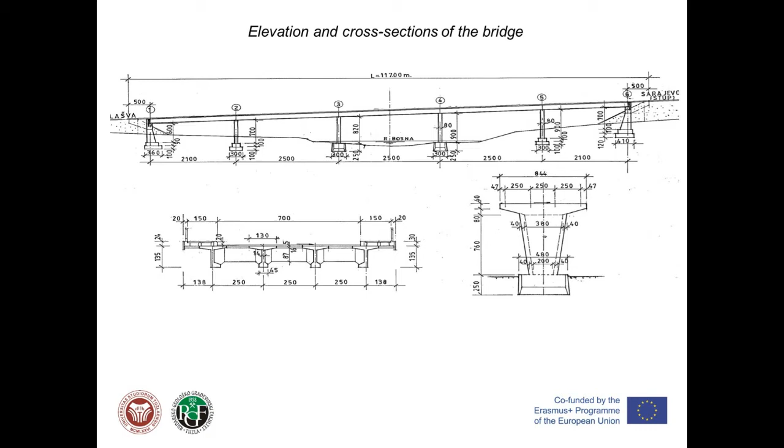The 5 spans of the deck are interconnected through a 16 cm thick continuity slab over the piers. The superstructure is supported by rectangular laminated elastomeric bearings at the 2 abutments, marked in the figure with 1 and 6, and 4 piers marked 2, 3, 4 and 5.

The bridge is instrumented for ambient vibration test. Measurements were made without traffic interruption.

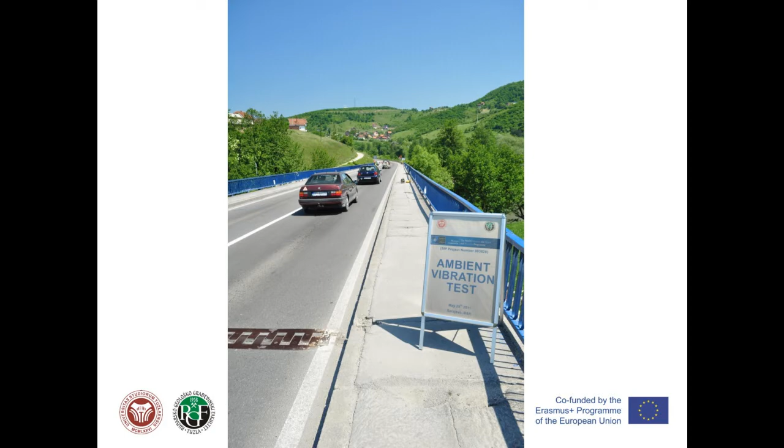On this slide, the arrangement of measuring points is shown. Ambient vibration test was made with 5 triaxial geophone sensors. One sensor was used for the reference point, stationary point 6R, while the remaining 4 sensors moved to individual measuring points 1 to 17 according to the arrangement.

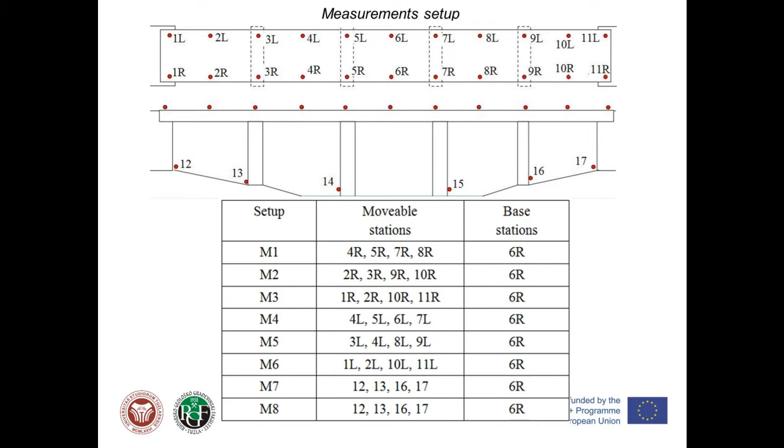Ambient vibration measurements were performed using an Instantel Minimate Pro 4 vibration monitor with sample rate from 1024 to 16,384 samples per second per channel. The triaxial geophone sensors used had a range of measurements up to 254 mm per second, with resolution 0.127 mm per second or 0.0159 mm per second, and accuracy plus minus 5% or 0.5 mm per second. Frequency range is from 0 to 315 Hz.

The recording system has start common trigger capabilities to enable synchronized data acquisition.

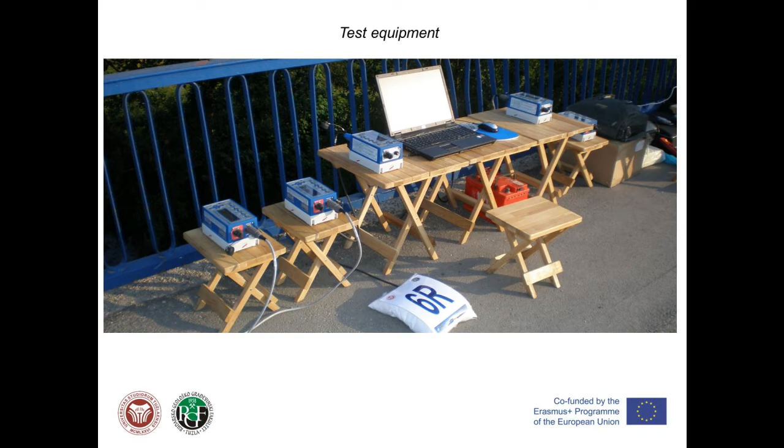During all tests, normal traffic flow was permitted. Testing started in the right lane, points 1R to 11R. Each setup yielded 3 base channels, point 6R, and 12 movable channels.

The ambient vibration was simultaneously recorded for 120 seconds, resulting in approximately 500,000 data points per data set.

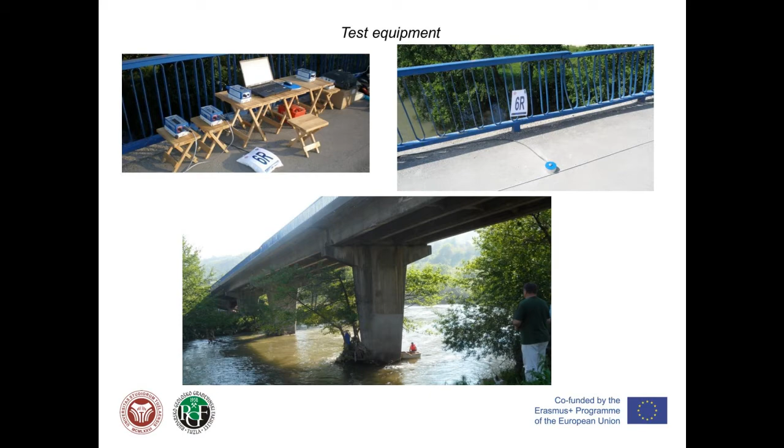This slide shows the measurements at the base station 6R.

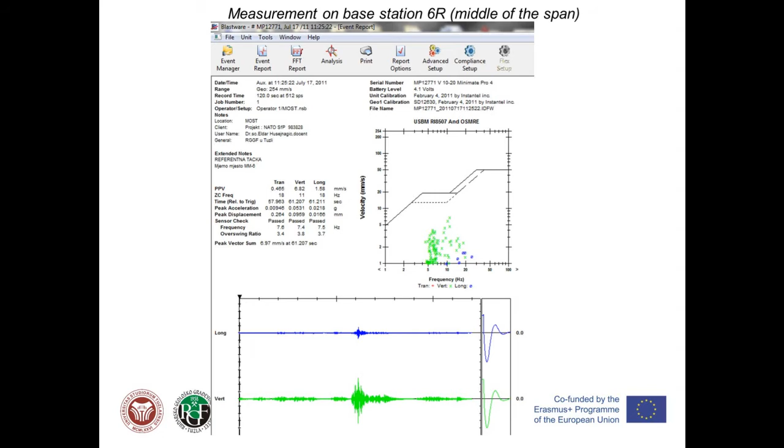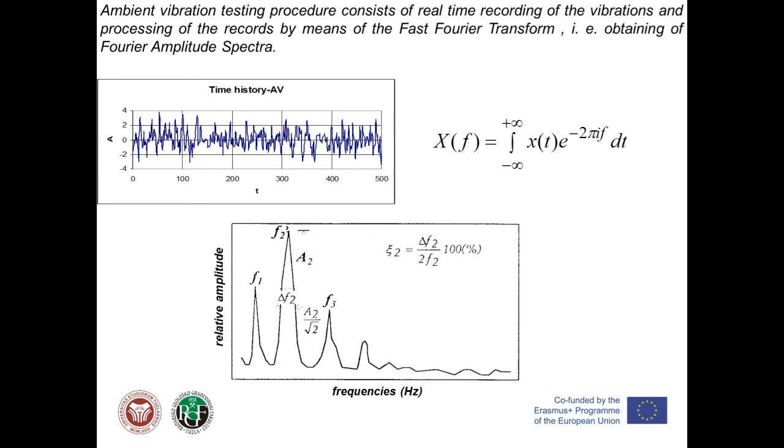Ambient vibration testing procedure consists of real-time recording of the vibrations and processing of the records by means of the fast Fourier transform, obtaining Fourier amplitude spectra. The peaks of the amplitude spectrum occur at the predominant frequencies of the time function xt, which, due to the flat spectrum of the excitation, represent the natural frequencies of the structure.

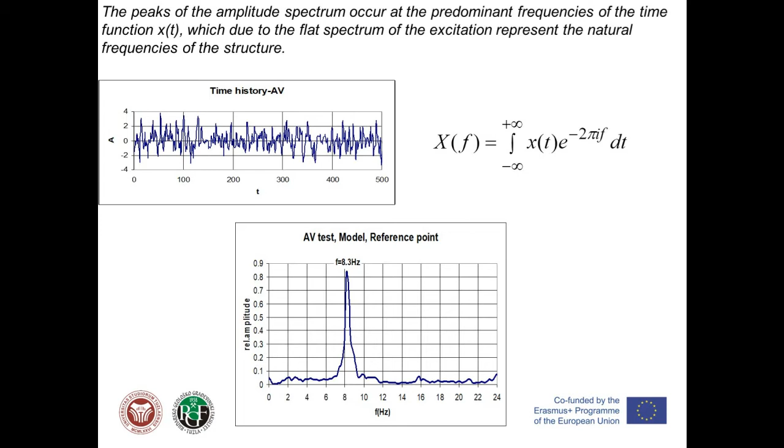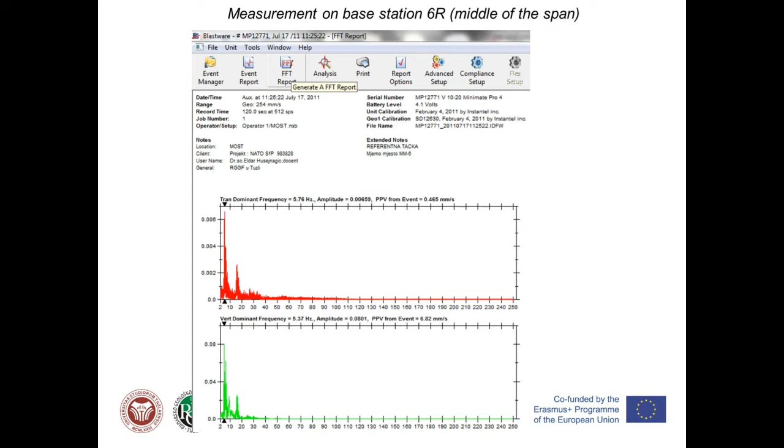The sensors installed along the deck and at the bottom of the abutments and piers recorded the bridge response and velocity time histories with 120 second recording time. Then frequency spectrum were obtained by using the FFT.

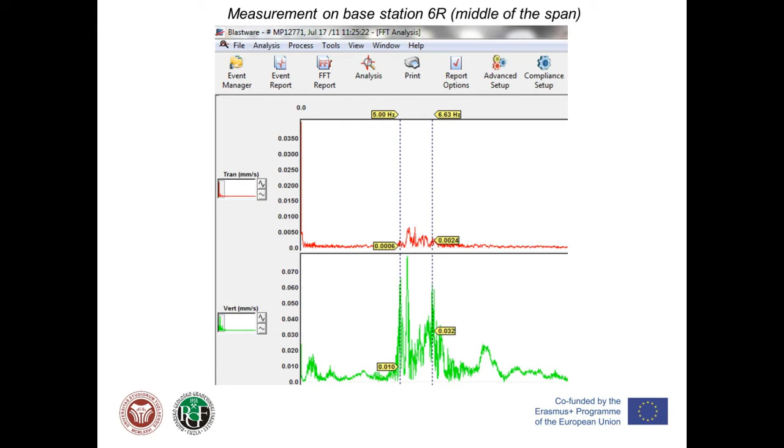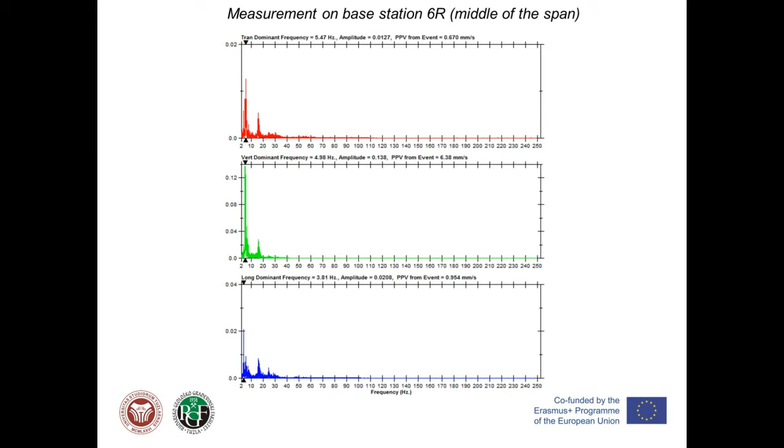Here is presented an example of one measurement on base station 6R and one measurement on movable station 4R.

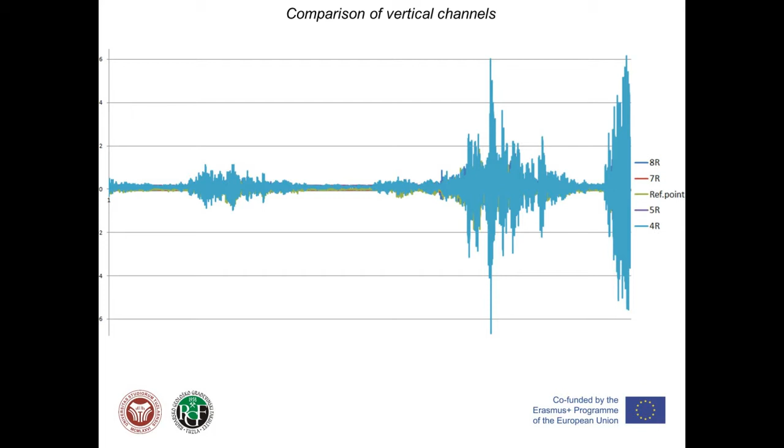On this slide, comparison of vertical channels for measurement setup 1 is presented. The dominant frequencies measured at measuring points are given in the table. The dominant frequencies of vibration of the superstructure measuring points, except for a few results, are in range from

3.81 to 7.95 Hz, depending on position of the measuring point over the support or in the middle of the field. The obtained results of measurements, dominant frequencies, are within the limits of test results on similar concrete bridges.

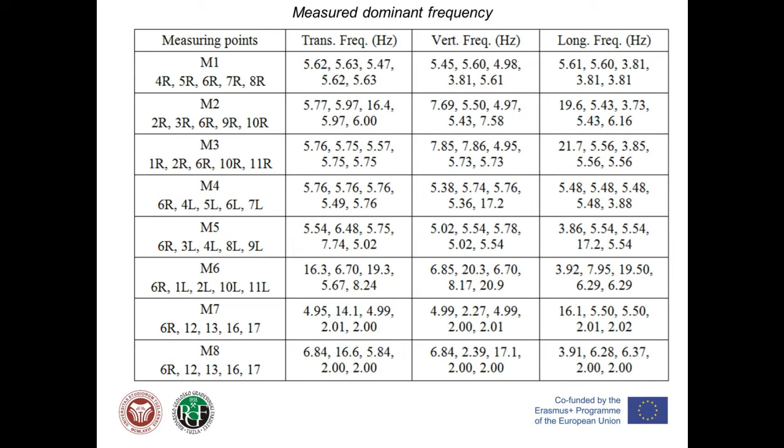There is a difference between the dominant frequency of vibration of abutments and piers on either coast, which will be the subject of further analysis by defining the soil-structure interaction.

The software ARTeMIS Extractor was used to perform the modal identification of the structure. Before the procedure of modal identification, it is important to validate all channels.

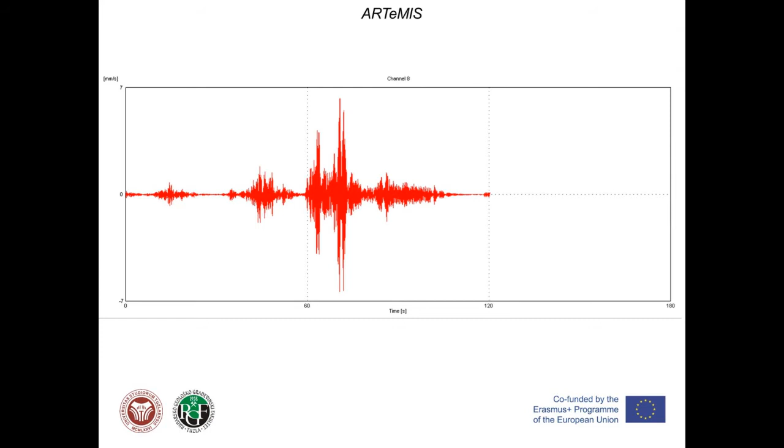Two techniques were used to perform the modal identification: the frequency domain decomposition and the stochastic subspace identification. The frequency domain decomposition, the first technique, consists of performing an approximate decomposition of the system response into a set of independent single degree of freedom systems for each mode.

The singular values are estimates of the spectral density of the single degree of freedom systems, and the singular vectors are estimates of the mode shapes.

The enhanced frequency domain decomposition feature offered by Artemis adds a modal estimation layer to the frequency domain decomposition editor. When the frequency domain decomposition analysis is completed and the mode shapes are identified, the enhanced frequency domain decomposition identifies the single degree of freedom Bell functions, and from this single degree of freedom spectral bells, all modal parameters are

estimated. The damping ratio can also be obtained.

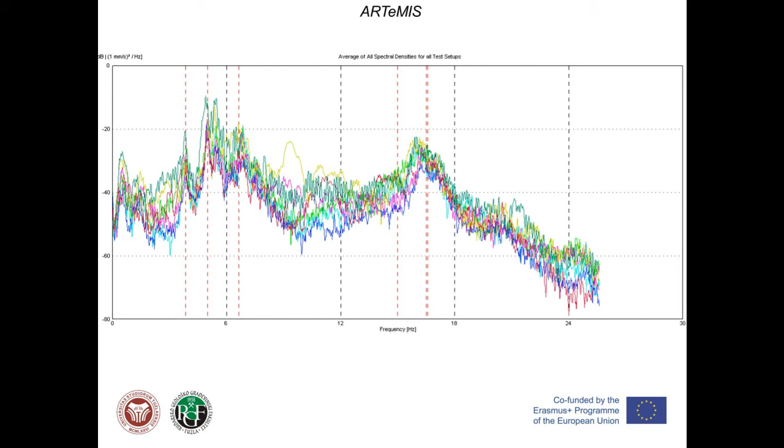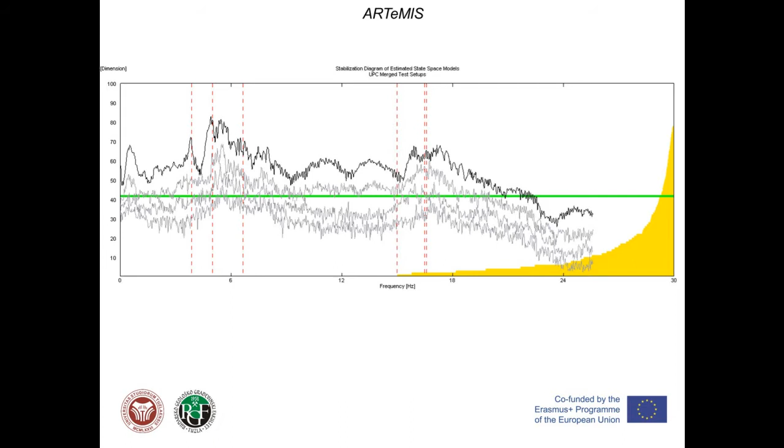Here is presented the average of autospectral densities. And on the next slide, the stabilization diagram of the estimated state space model of the first test setup, attained from vibration signals using the enhanced frequency domain decomposition and the stochastic subspace identification methods.

On this slide, natural frequencies and the damping ratios obtained from the test setup are presented.

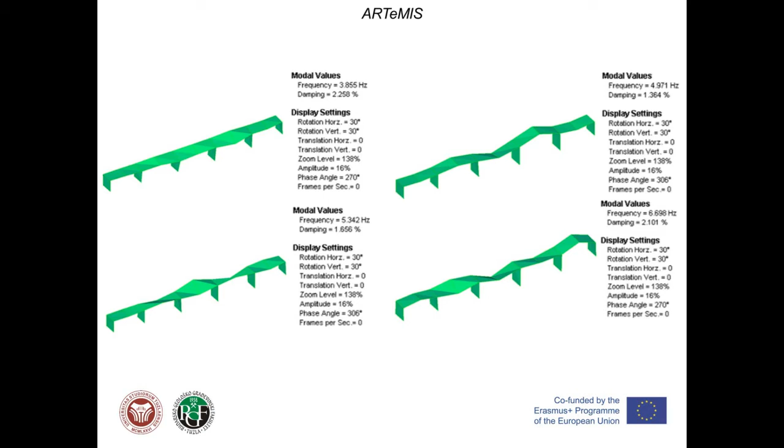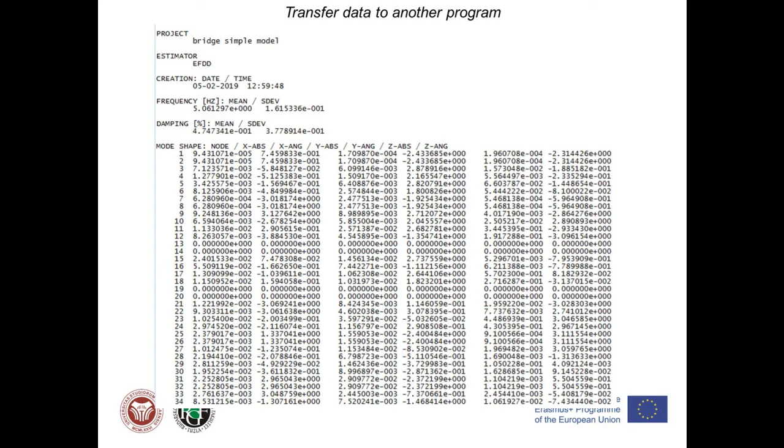For the procedure of determination of mode shapes, data from Artemis can be transferred as an ASCII file. On this slide, one example of data list is presented.

The finite element models were created using SAP 2000 based on the geometrical and material properties that were used for design, prediction of material properties after 45 years service life, and on the preliminary soil investigation.

The first set of models, called SNB1M1, is a finite element model with different soil stiffness, designed neoprene bearings stiffness and designed strength of concrete.

The second, called SNB1M2, is a finite element model with designed neoprene bearings stiffness and theoretically predicted strengthening of concrete during service life.

And the third and the fourth, called SNB2 and SNB3, are finite element models with increased neoprene bearing stiffness and theoretically predicted strengthening of concrete during service life.

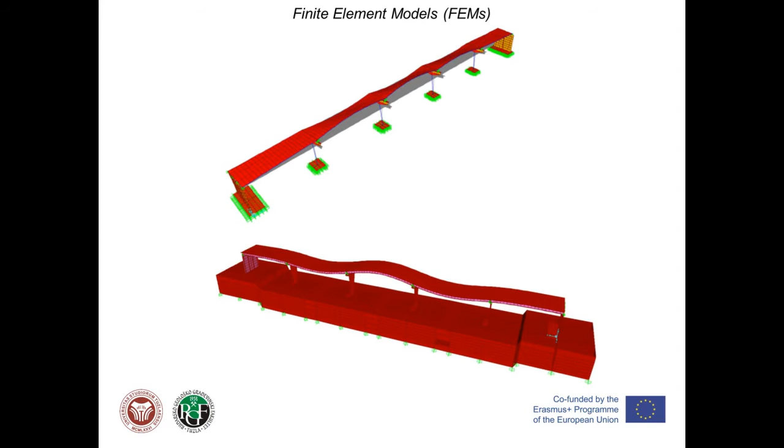The deck was modeled as a shell element and girders as elastic beam elements, as this approach provides effective stiffness and mass distribution characteristics of the bridge.

The bridge superstructure itself is expected to remain essentially elastic during earthquake ground motions. Dimensions of neoprene bearings are 300 by 400 by 100 mm, and neoprene bearings are modeled with vertical and horizontal springs.

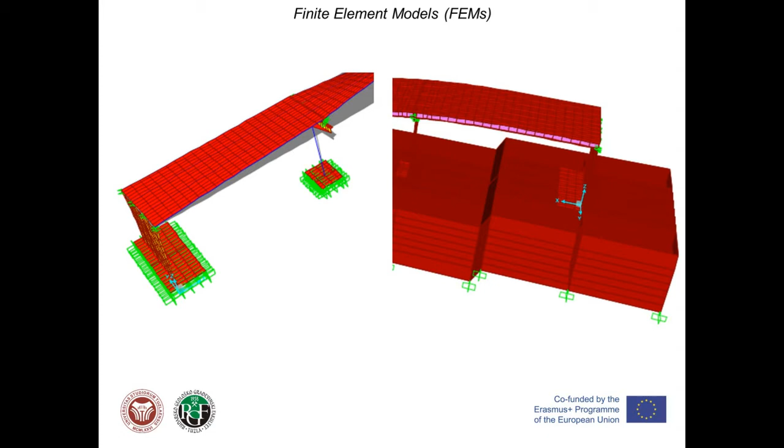Soil was modeled in two ways: a soil model with linear springs used for the structure-soil interaction in models S1 to S4, and a second, layered soil model with solid elements, models S5 and S6,

with modulus E determined by preliminary geophysics soil measurements, used for the solid elements.

The foundation structure was also modeled using solid elements, so that the soil foundation contact has been realized by identically arranged nodes of the solid soil elements and the foundation structure.

Review of the models is presented in the table.

Since the scope of the research was to validate the modeling assumptions made and identify their relative impact on the numerically predicted structural response, the developed finite element models were assessed comparatively. Through this procedure, longitudinal, transversal, bending and torsional modes were identified, whose modal frequencies are summarized in the table.

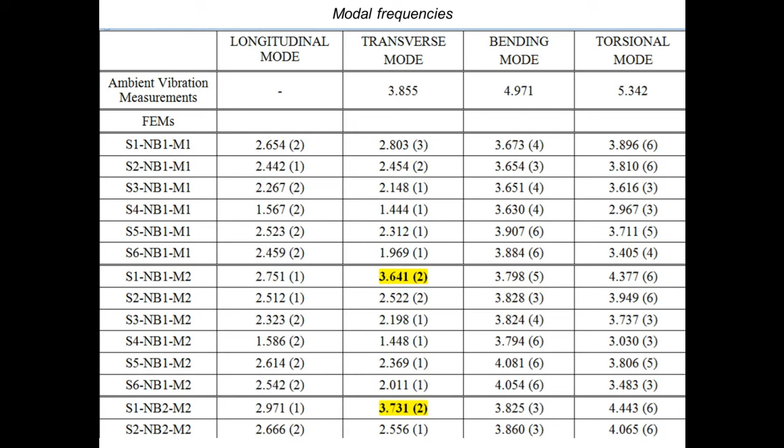The results presented in the table show the improvement of the modal frequencies predicted by the models S1NB2M2, S1NB3M2, and S5NB3M2, compared to the modal frequencies predicted by the S1NB1M1 model.

By comparing the modal frequencies predicted by the mentioned models, it is clear that the Young's moduli of elasticity for the bearings, the deck and the piers had to be significantly increased compared to the values assumed in the initial design. This can be clearly attributed to the low deformation strain levels developed under ambient vibrations, at which the bearing stiffness is significantly higher than that assumed during design. Also, the effect of concrete strengthening during service life has to be considered.

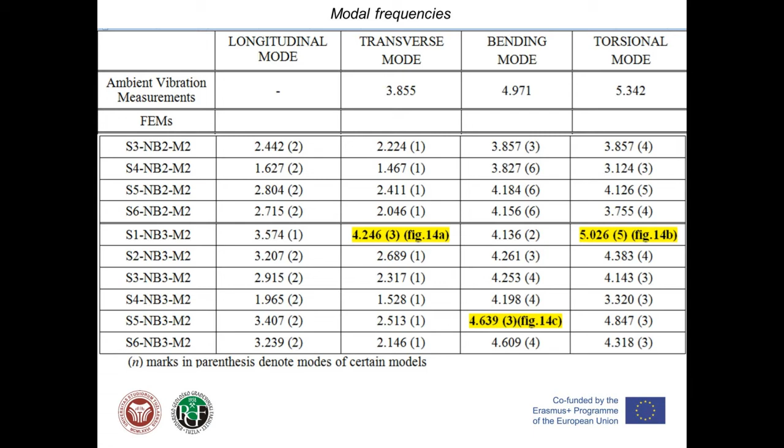For comparison of the model parameters identified by ambient vibration tests and mathematical models, two finite element models named AM1 and AM2 were selected. AM1 is the selected model S1NB3M2, and AM2 is S5NB3M2. The comparison is made for the first transverse and first vertical modes.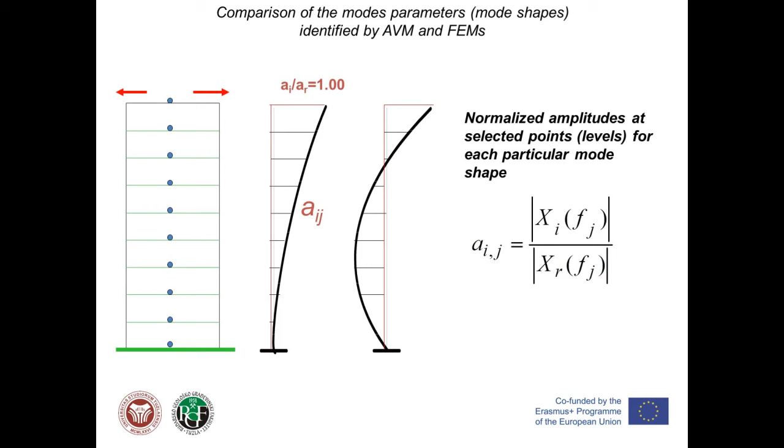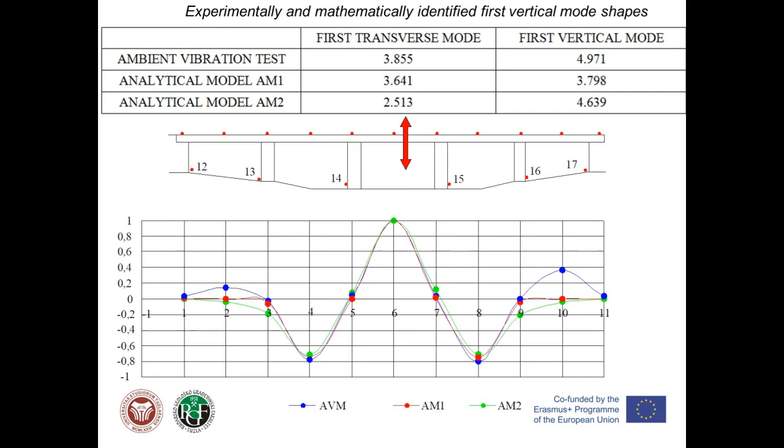Here is presented the experimentally and mathematically identified modal frequencies and mode shapes for the first vertical modes. And on this slide is presented the mode shapes for the first transverse modes. There is good agreement between the vertical mode shapes obtained by ambient vibration measurements and by the AM models.

The deviations between the experimentally identified and mathematically predicted first transverse mode shapes can be attributed partially to uncertainty in the material properties of structural elements and neoprene bearings after 45 years of service. But deviations could also be partially due to unexpected channel errors, which will be studied in further research.

Based on the study, it can be seen that ambient vibration measurement can be used to assess the dynamic properties of older existing bridges.

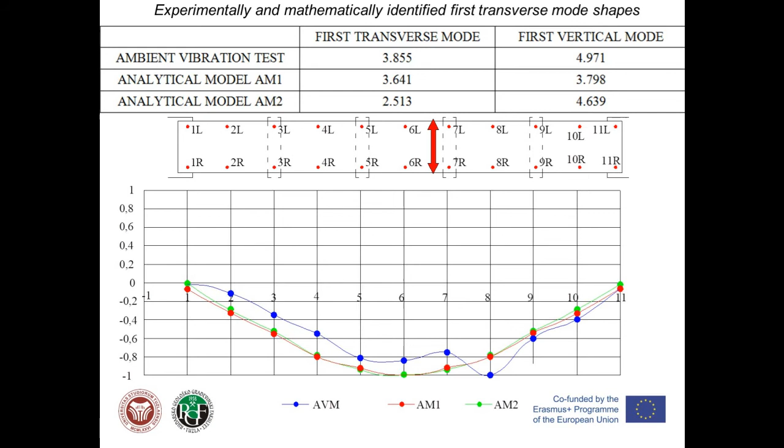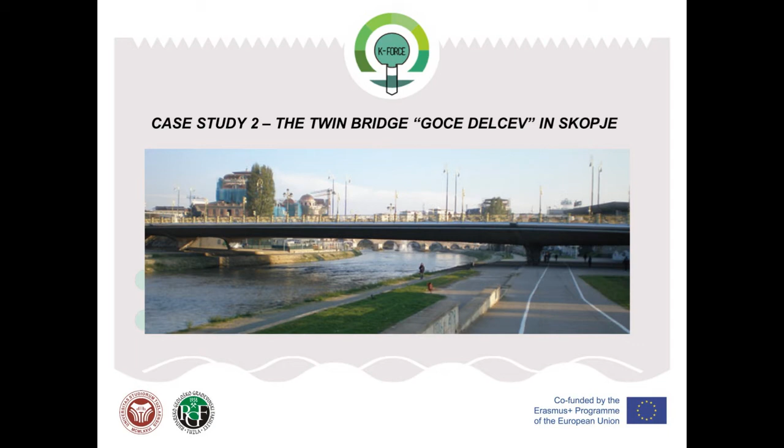The second case study is the twin bridge Goce-Delchev in Skopje, Macedonia. The twin bridge Goce-Delchev is a pre-stressed girder bridge with a multi-box cross-section. Total length of the bridge is 136 meters, with 3 spans: 24 plus 88 plus 24. The main supports are middle piers and counterweighted at the ends of the bridge.

The bridge is a very complex structure. During the serviceability period of about 40 years, several revitalization works have been done in order to improve the structural conditions of the bridge. Based on structural state diagnosis, an appropriate bridge revitalization concept has been selected and realized.

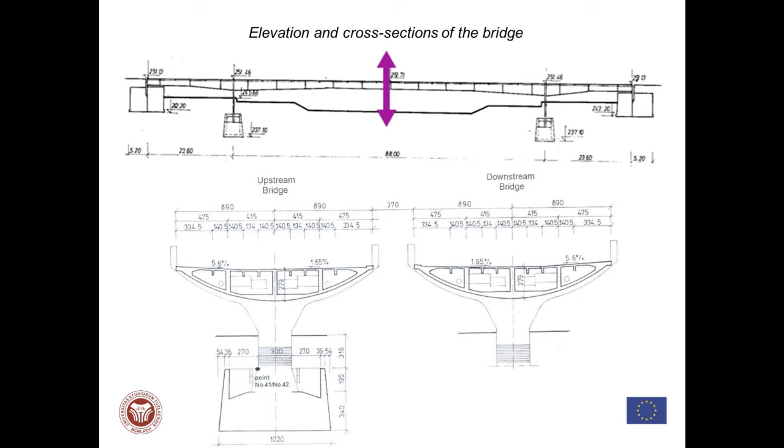The generated experimental results from the ambient vibration tests were very important in verification of the formulated mathematical models and reanalysis of the bridge's seismic safety. On this slide, the arrangement of measuring points is shown.

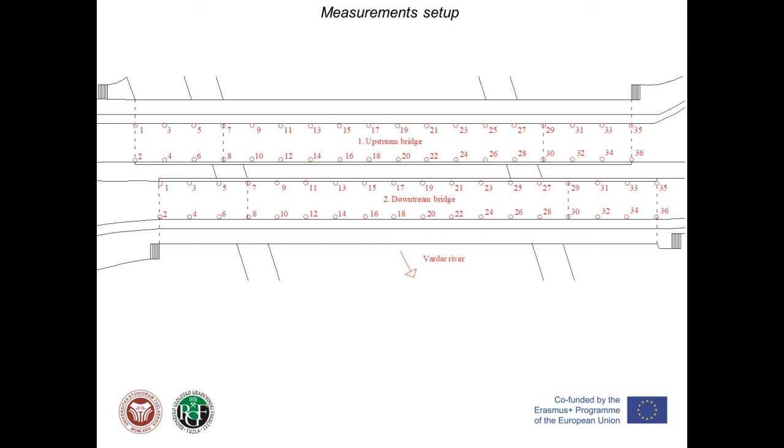Arrangement of measuring points is the same for both bridges. One point, 16R, is selected for stationary station.

Two measuring points are selected outside both ends of both bridges, points numbers 37, 38, 39 and 40. Two measuring points are selected at the bottom of the two middle piers of each bridge, points number 41 and 42. Bridge measuring points from number 1 up to number 36 are distributed in two lines at a longitudinal distance of 8 meters. The table shows the different station distributions of each setup.

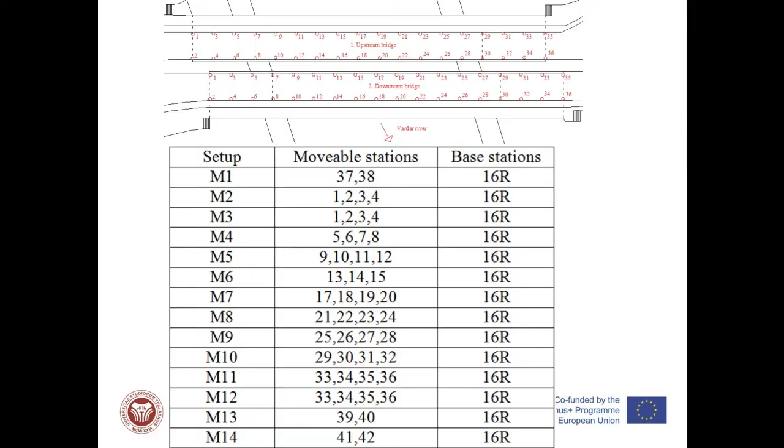The traffic was held up during the testing procedure.

Each measurement setup yielded 3 base channels, 16R, and 12 movable channels. The ambient vibration was simultaneously recorded for 120 seconds, resulting in around 500,000 data points per data set.

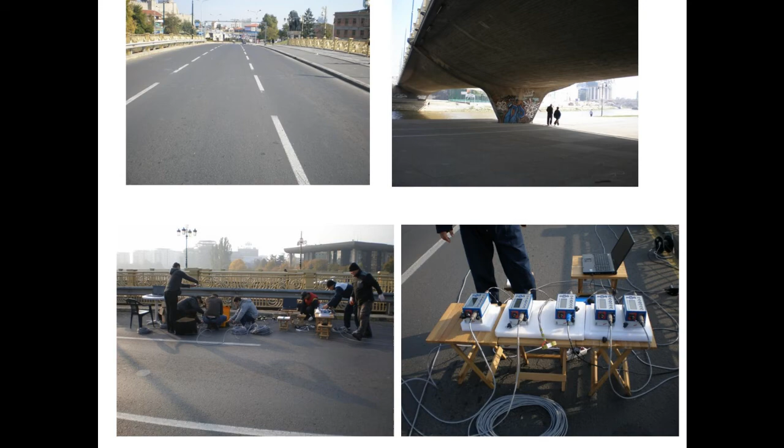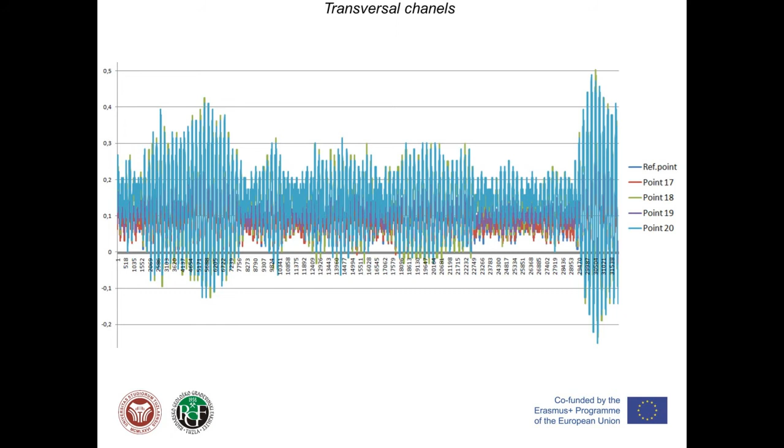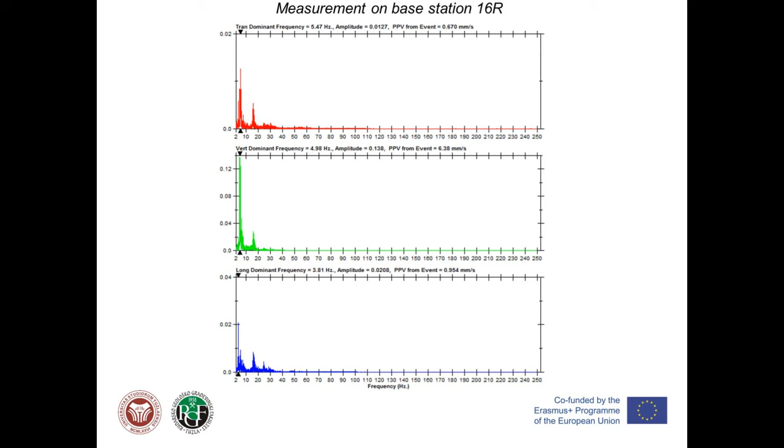Here is presented a comparison of transversal channels for one measurement setup. On this slide, measurement on base station 16R is presented. And on this slide, measurement on the movable station is presented.

In the table, the dominant frequencies measured at measuring points of the upstream bridge are presented. From the results, it can be seen that the dominant frequencies of vibration of the superstructure measuring points range from 1.28 to 2.92 Hz.

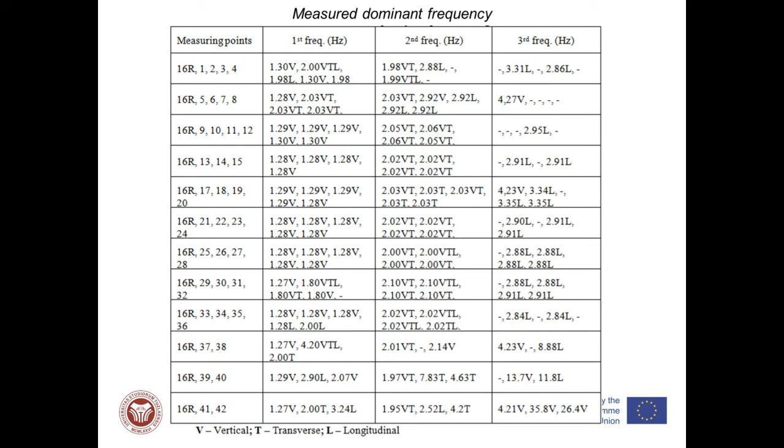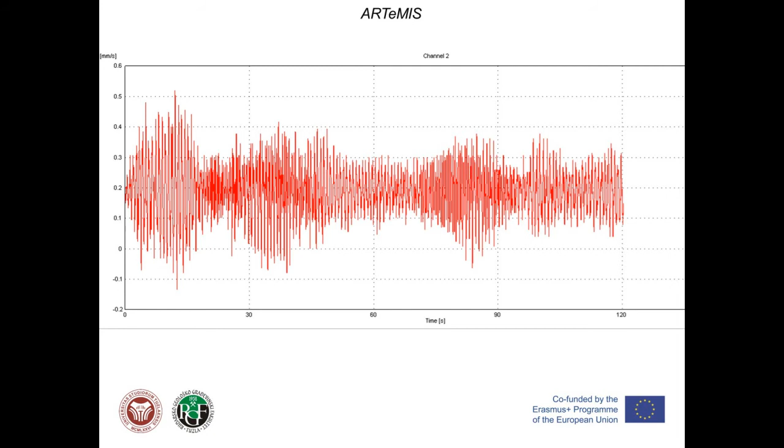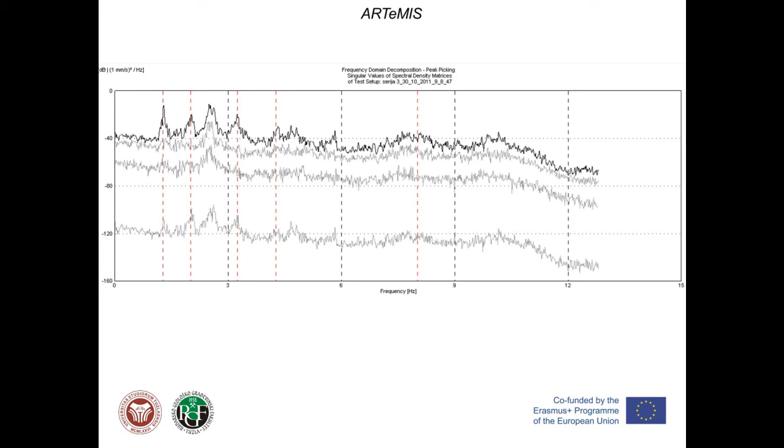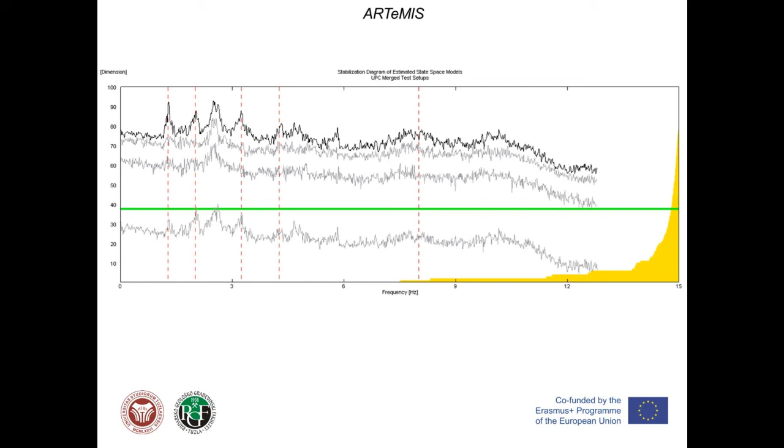Here is presented the average of all spectral densities. And on the next slide, the stabilization diagram of the estimated state space model.

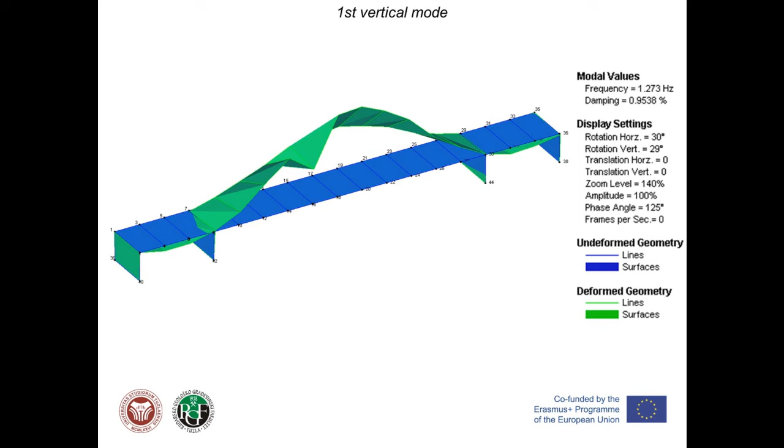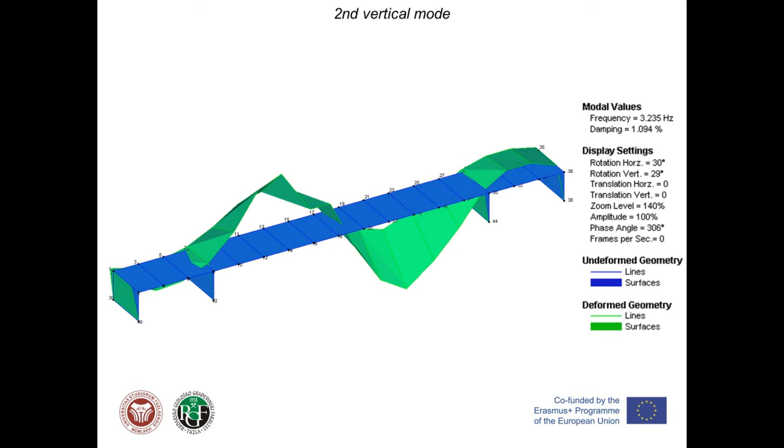On this slide, natural frequency and damping ratio for the first vertical mode are presented. And here is presented the first transverse mode. Then natural frequency and damping ratio for the second vertical mode, and for the second transverse mode.

The mathematical model AM3 was created using finite elements with SAP2000. As the complete bridge structure was executed as a monolithic structure, the superstructure and substructure were modeled as an integrated structure. The superstructure was modeled as a shell element and the piers as elastic beam elements, as this approach provides effective stiffness and mass distribution characteristics of the bridge. The pier's soil contact was modeled as a stiff support.

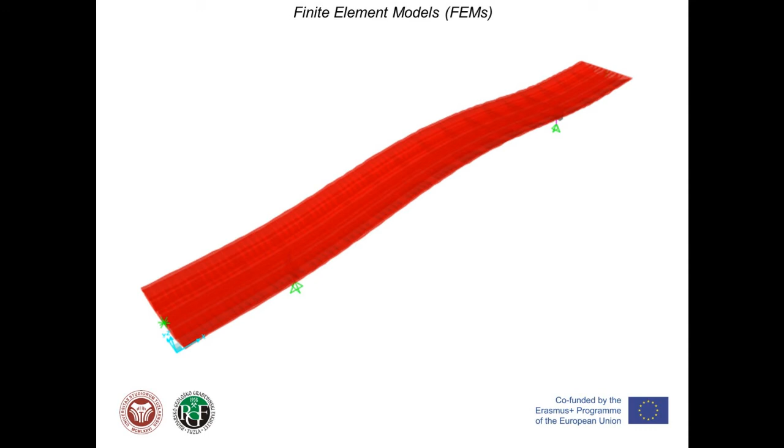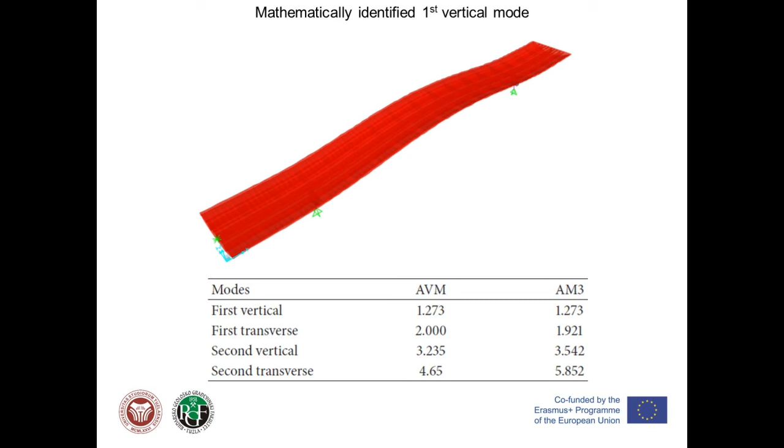In this slide, the mathematically identified first vertical mode shape is presented. And here is the second transverse mode shape.

The scope of the research was the comparison of the modal parameters identified by ambient vibration measurement and model AM3. The comparison was made for the first vertical, second vertical, first transverse and second transverse modes. Experimentally and mathematically identified modal frequencies are presented below the figure.

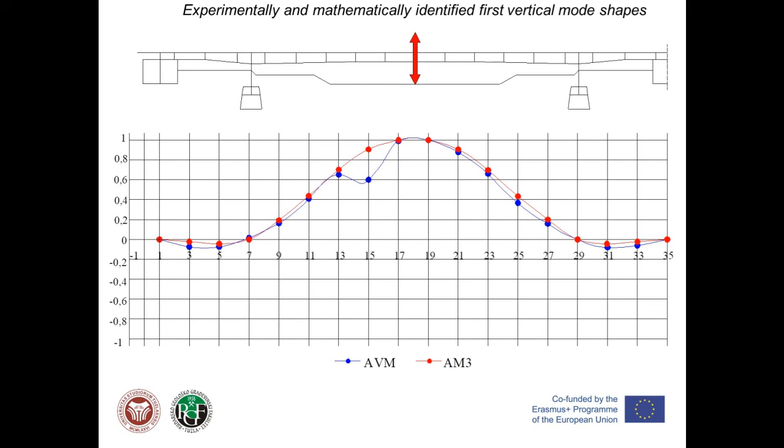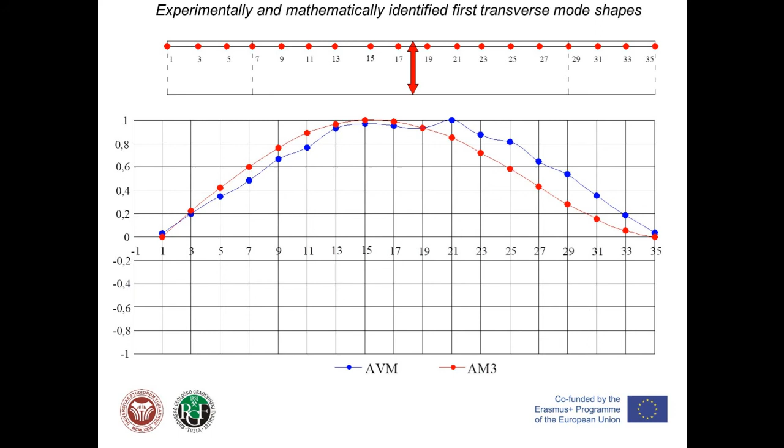The following slides show mode shapes obtained by ambient vibration measurement and by numerical models. You can see first vertical mode shapes, first transverse mode shapes, second vertical mode shapes, and second transverse mode shapes.

When the mathematically and experimentally identified modes are compared with each other, it is seen that there is very good agreement between natural frequencies of the first modes. Also, there is good agreement between first vertical, first transverse, and second vertical mode shapes.

The larger deviation was identified between the experimentally identified and mathematically predicted second transverse mode shapes. For the exact definition of obtained deviations, detailed investigation is necessary. The reasons could be boundary conditions, geometrical and material property assumptions, and eventually unexpected channel errors.

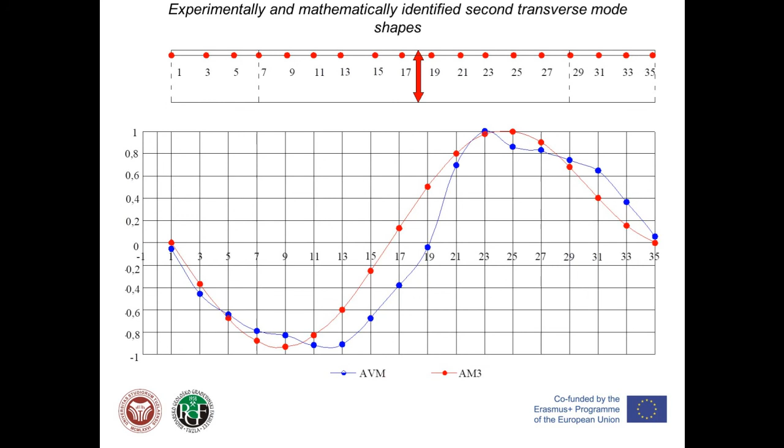The third case study is the cable stayed bridge in Tuzla, Bosnia and Herzegovina. This case study is interesting because a short tower is designed due to urban conditions, which resulted in a small angle of the first and second cable. Consequently, during construction, increased deflections appeared in the part of the structure supported by the two mentioned cables.

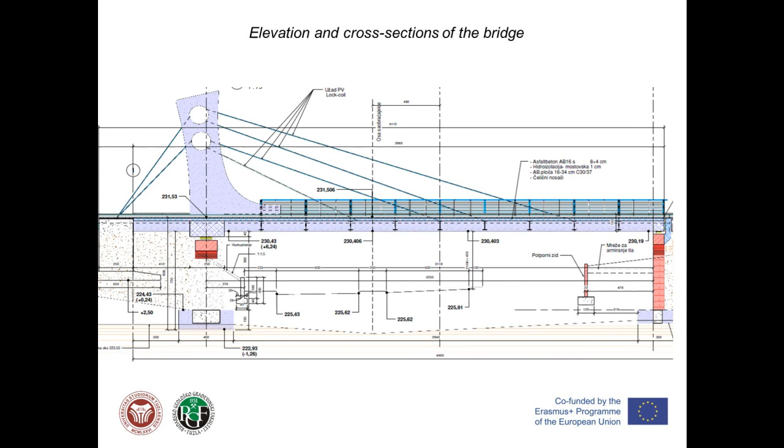The overpass is used for crossing pedestrians and vehicles over the city streets in Tuzla. It was designed and constructed as a cable-stayed bridge. The cross-section consists of two traffic lanes 6 meters wide and a pedestrian lane. The total width of the bridge is 14.6 meters. The bridge span is 32 meters.

The superstructure consists of two main prestressed beams and a composite bridge deck. The composite deck consists of a concrete slab with variable thickness from 16 to 34 cm, coupled with steel I-beams on a 3.25 meter grid. Main prestressed beams are hanged on 4 cables.

The primary load-bearing structure consists of a reinforcing concrete tower, cables and steel ties. The reinforcing concrete tower is 9.5 meters in height. Cables for supporting the main prestressed beams have diameter 60 mm for the first and second cable, and diameter 80 mm for the third and fourth cable. Steel ties with a counterweight concrete block consist of 20 rebar with diameter 32 mm on one tower.

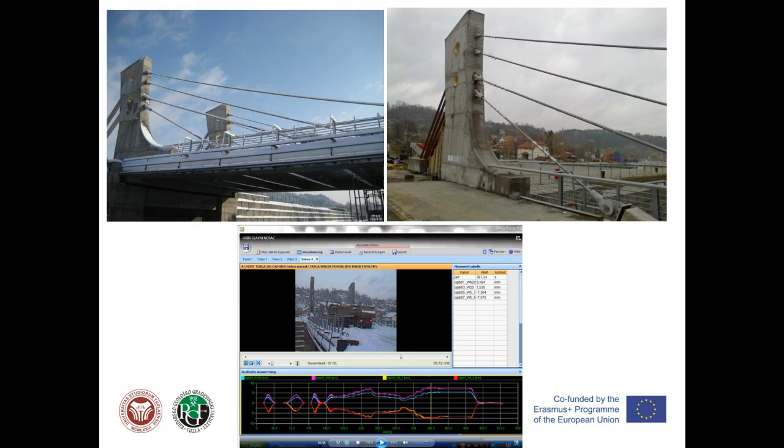Ambient vibration test was made using 0.5 G accelerometer sensors. Operating frequency range of the used accelerometer is 0.5 to 500 Hz, with acceleration range 0.5 G and resolution 0.00025 G. One accelerometer was used for the reference stationary point 1, while the remaining 2 accelerometers moved to individual measuring points 2 to 22 according to the arrangement.

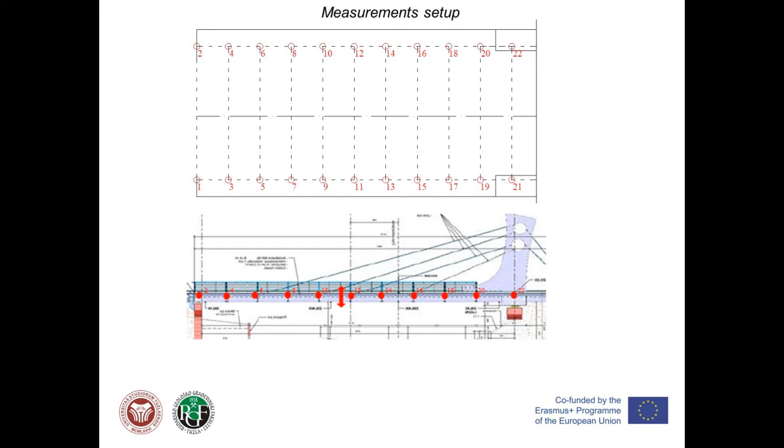Normal traffic flow was permitted during the testing procedure. The ambient vibration was simultaneously recorded for 120 seconds, resulting in 500,000 data points per data set.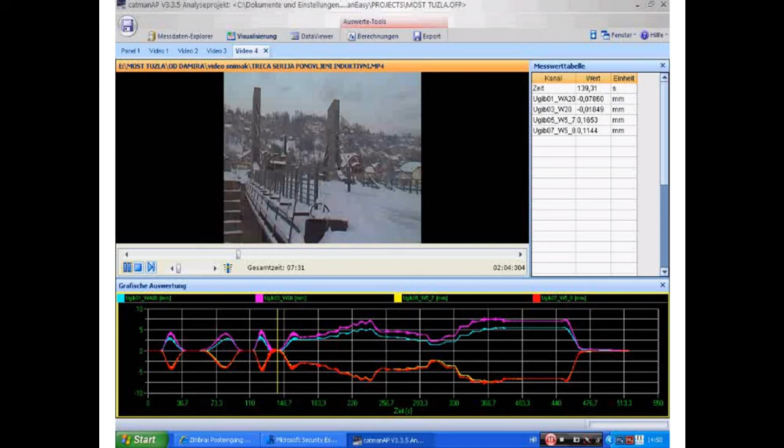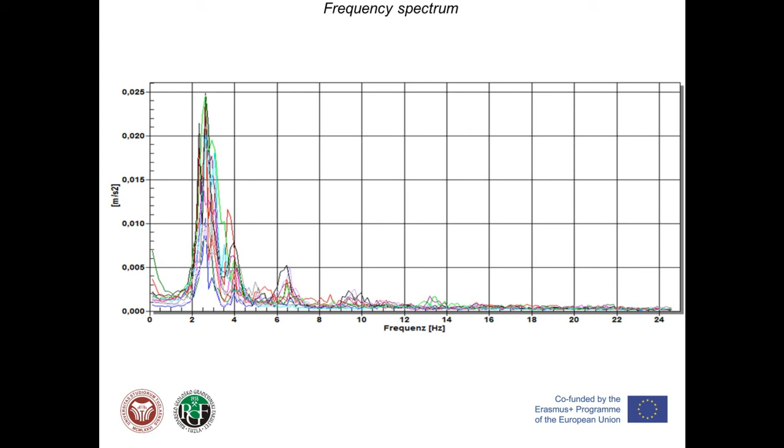In this slide, the results of the measurements' frequency spectrums are presented. The dominant frequencies of vibration of the superstructure measuring points are in the range from 2.5 to 6.5 Hz.

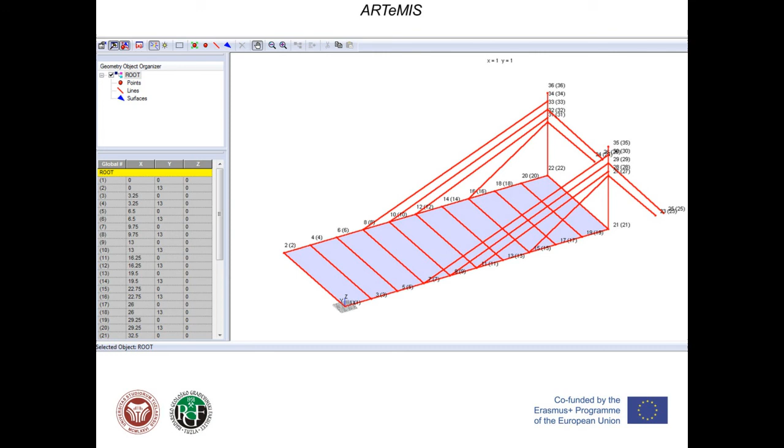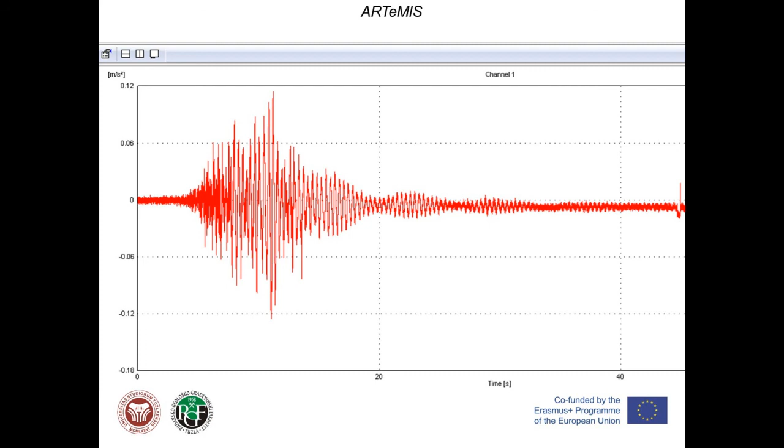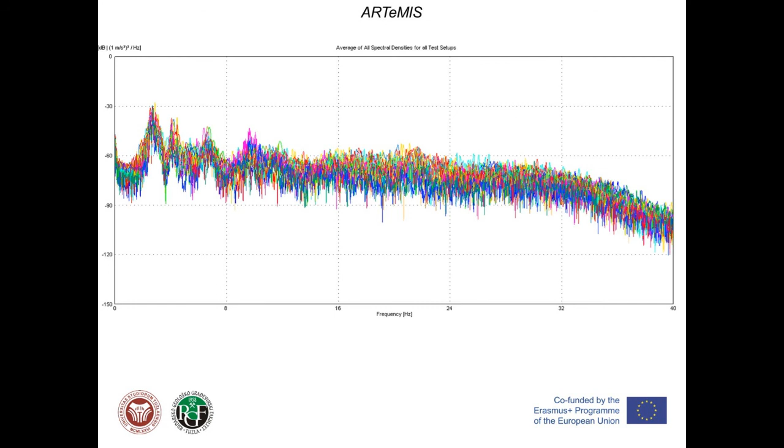The software ARTeMIS Extractor was used to perform the modal identification of the structure. Before the procedure of modal identification, you have to validate all measured channels. On this slide, the average of all spectral densities is presented. And on this slide, singular values of spectral density matrices for single degree of freedom systems are presented.

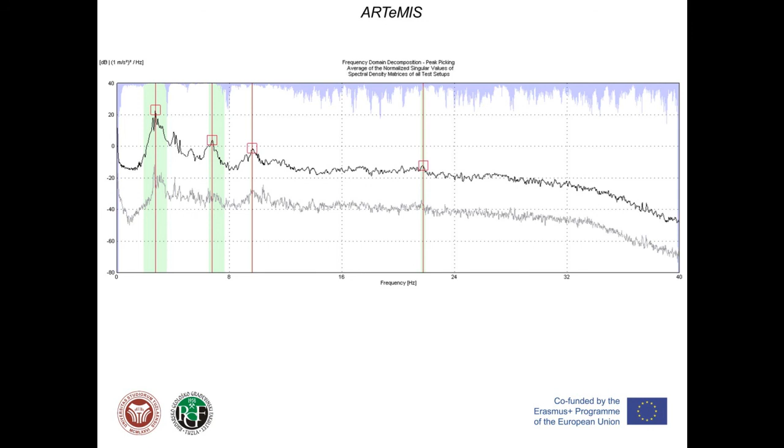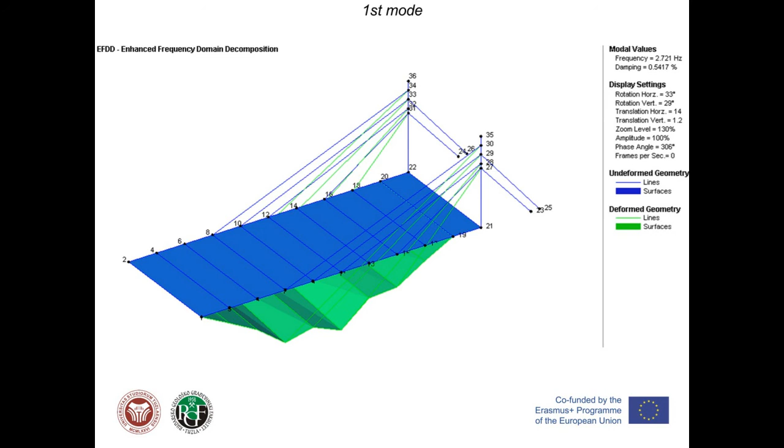Here is presented the natural frequency and damping ratio for the first vertical mode shape, then for the second vertical mode shape. The first and second modes were obtained using the enhanced frequency domain decomposition method. The first mode has a frequency of 2.721 Hz, and the second has 6.79 Hz.

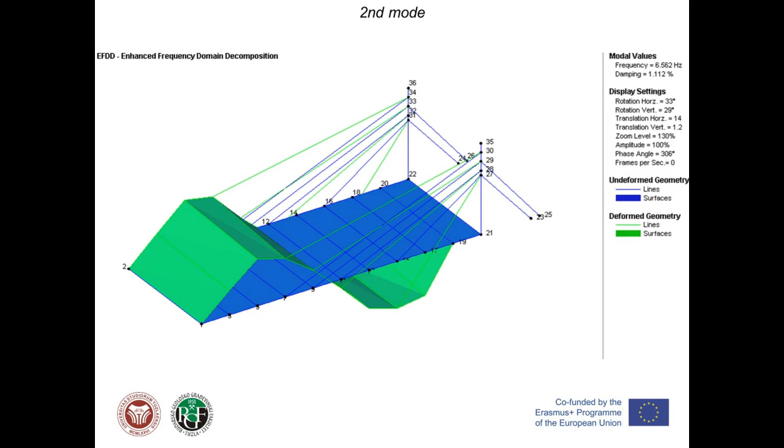The mathematical model, marked AM4, was created using finite elements. The deck was modeled as a shell element. Main prestressed beams and steel I-beams were modeled as elastic beam elements, and cables as ties. Material property was modeled based on the design parameters. The pier support contact was modeled as a stiff support.

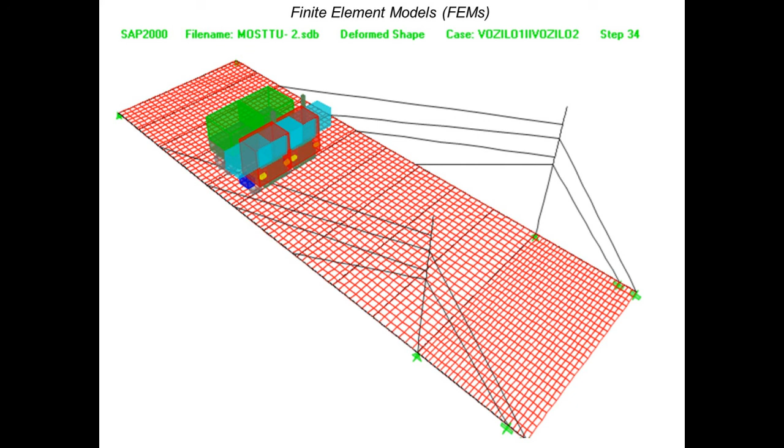Here you can see the mathematically identified first and second mode shapes. The comparison was made for the first mode and the second mode. Experimentally and mathematically identified modal frequencies are presented in the table below the figure.

The ambient vibration measurement was performed a year after construction of the bridge, when the mathematical model AM4 and the experimentally identified modes are compared. It is seen that there is a very good agreement between modes. The difference of natural frequencies obtained by ambient vibration measurement and by model AM4 is 4%. Since the bridge is new, this value can be attributed to the geometry simplification in modeling of the tower and uncertainty in the designed material properties of structure elements.

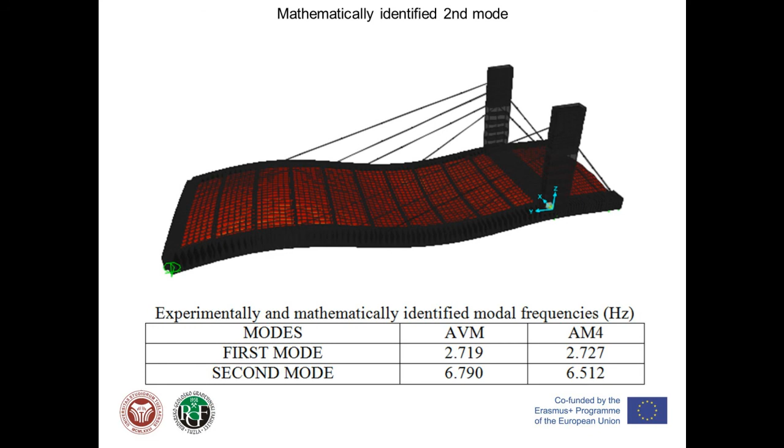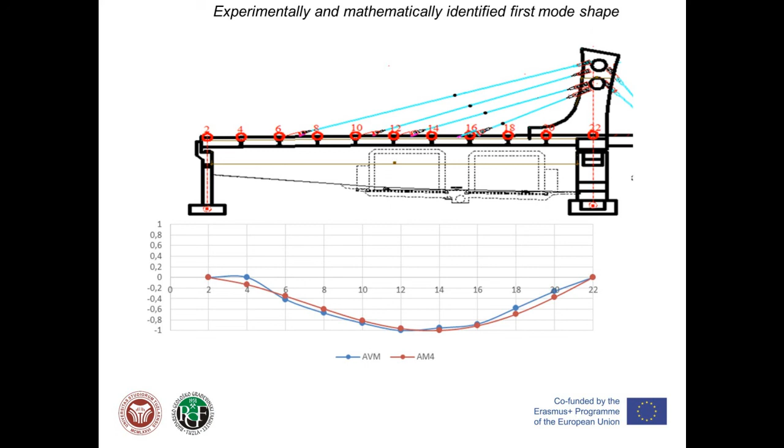The following slides show mode shapes obtained by ambient vibration measurements and numerical models. You can see the first vertical mode shapes and the second vertical mode shapes.

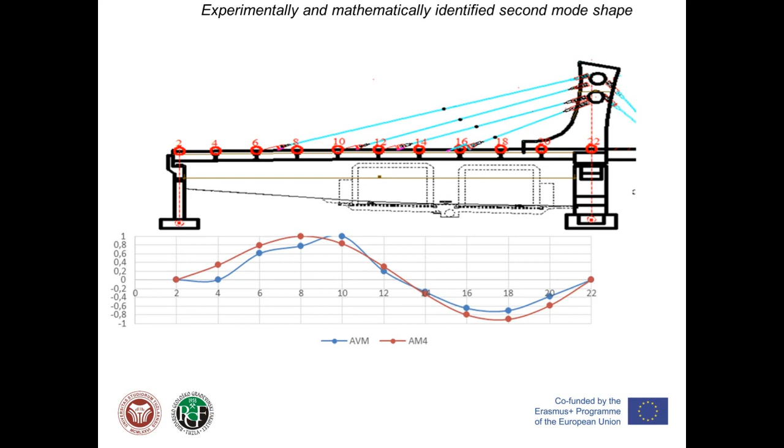The presented studies show that signal analysis of ambient vibration records allows the determination of the dynamic characteristics of the bridge. In addition, the frequency and associated modes of vibration can be assessed with an adequate mathematical model. The presented results clearly indicate the great potential that ambient vibration measurements hold for monitoring bridge structures. The data collected during the ambient vibration test, which only took some hours and very few resources, processed with adequate algorithms, provided very useful information.

The comparisons presented in the case studies constitute a validation of the developed mathematical models, and at the same time permit some fine-tuning, especially concerning the boundary conditions and unexpected channel errors. In particular, these slides clearly show that it was possible to extract a lot of useful information from data collected during the ambient vibration test.